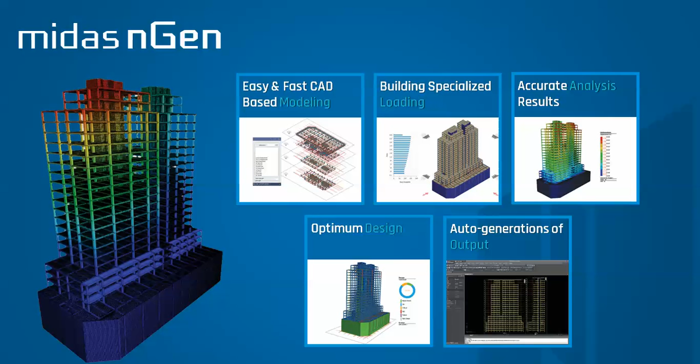CAD-based modeling. We can define our members by drawing lines in CAD and use snap points, or define a member by specifying the coordinates of the member endpoints, and of course various editing functionalities such as extend, trim, and offset. This nGen is like CAD, its modeling is CAD-based. Everybody knows what CAD means.

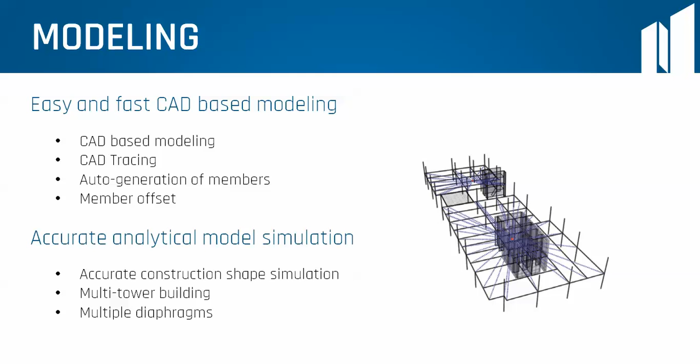Next po, itong opening. Mag-easy generate na po ang ating nGen ng mga opening whenever we need it in our projects. And auto-generate po ng mesh reflecting various shapes of the opening, depende po yan sa ating klaseng opening.

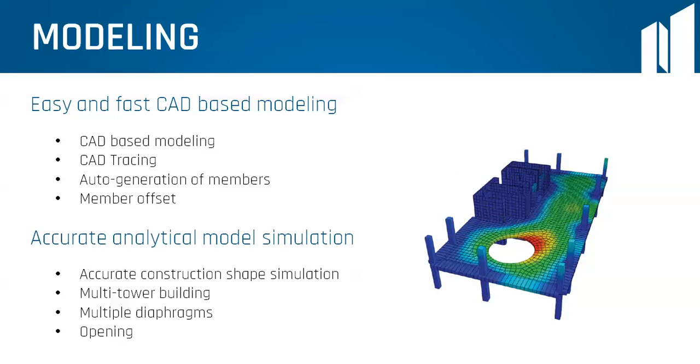Now, on our loading and analysis, meron po tayong practical loading definition for building design. Ito po, may intuitive user interface po siya for fast data input. First is defining our slab load.

Now, in the definition of slab loads, pwede na po natin siyang i-define slab loads into slab members. And mas madali na po i-revise yung applied loading value at ang ating area dito sa ating Midas nGen.

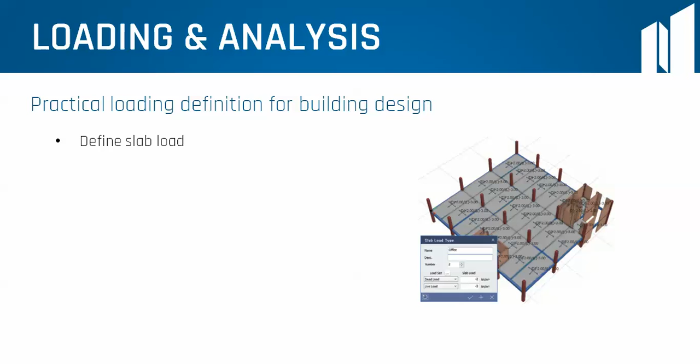Now, we can also define wind and seismic loads when we apply it in our loading and analysis. May auto-generation of wind and seismic loadings na po for the building.

And may loading profile and report generation na po siya, automatic, katulad po na nakikita natin sa picture. And of course, seismic loading input due to response spectrum function, meron na po niyan dito sa ating Midas nGen.

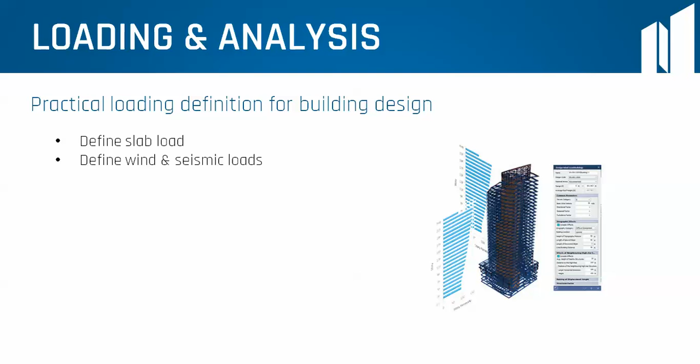Now, we can also define notional load. Ano po ba itong notional load? It can auto-generate for notional loads as per Eurocode and BS code, and may equivalent horizontal force na po ito based on the user-defined proportion ratio of the vertical load.

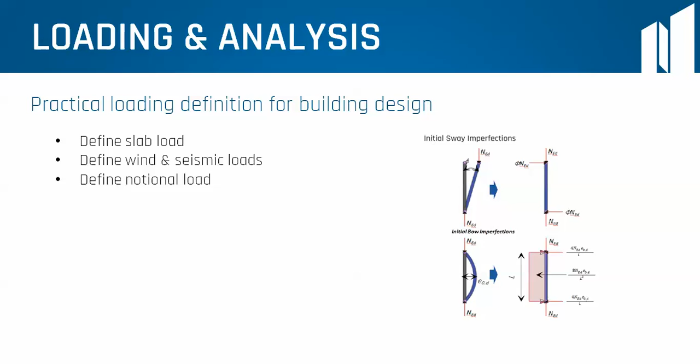Next po is we can also define our loading functions dito sa ating Midas nGen. May loading definition na po tayo dito in the form of a user-defined function.

Definition of soil pressure loading using geotechnical investigation results, pwede din po natin gawin yun. And of course, change the loading positions by moving the member, kasi nag-iiba po yung ating loadings kapag nag-move tayo ng member, so automatic na po yan sa ating Midas nGen.

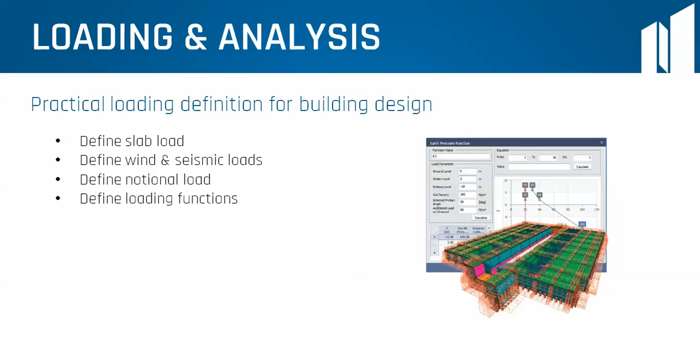Ngayon naman po, meron tayong advanced analysis features dito sa ating Midas nGen. Ito po yung parametric design using analysis cases. Makikita po natin na significantly, mas mabilis po yung speed natin.

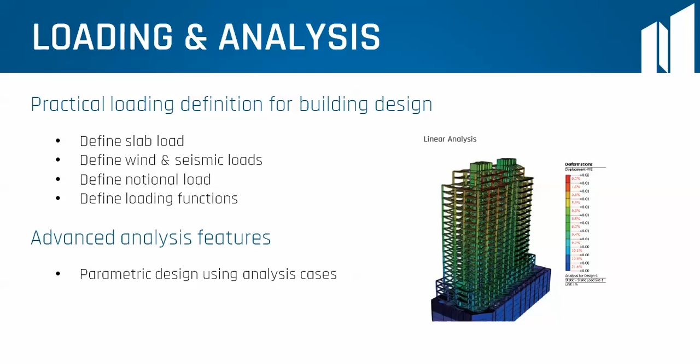For linear static, modal, buckling analysis, crane, and construction stage analysis dito sa ating Midas nGen.

It can also create various analysis cases composed of combination of members plus loads plus boundary conditions of the modeling data, which can be separately or jointly analyzed, or coupled analysis can be performed as well.

Now, we can also combine member force results of various analysis cases as required at the design stage.

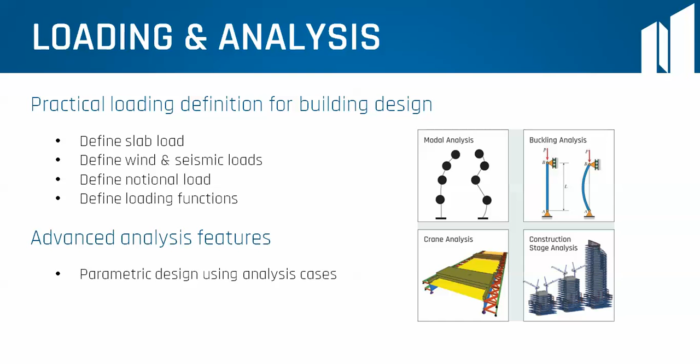Meron din po tayo dito sa ating advanced analysis features, meron din po tayong auto-generation of mesh reflecting connections between members. Makikita po natin na mag-auto-create na po ang analytical model natin from a geometric shape model.

For which midas nGen creates fictitious nodes at the connection positions where members meet. So, mas madali na po sa atin yan gawin.

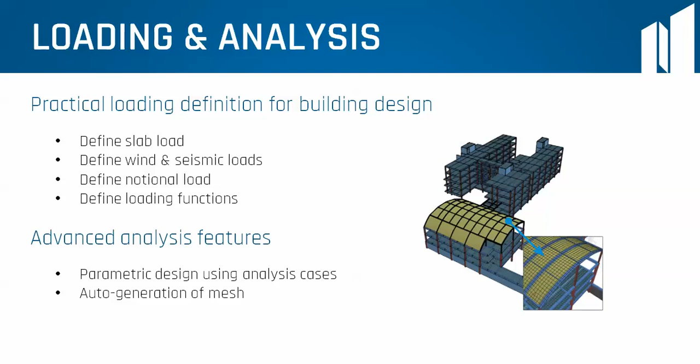Meron din po tayo ditong direct analysis method, or tinatawag po nating DAM, as a new design method for stability. Available na po ito, which includes nominal geometric imperfection and stiffness reduction effects directly within the structural analysis for a more accurate structural behavior. Now, so much for our loading and analysis.

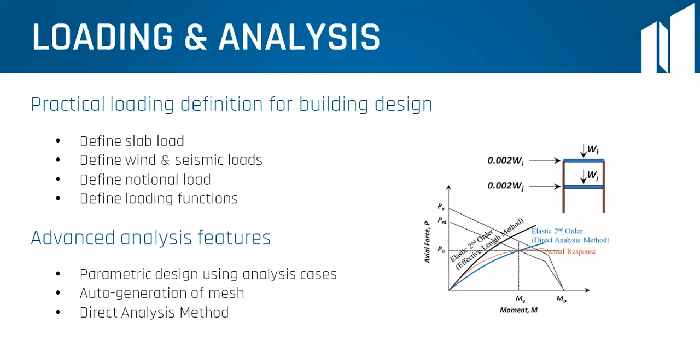Punta naman po tayo sa ating design. Dito naman po sa ating design, meron tayong optimal steel section and reinforcement calculations. Makikita po natin na meron tayong dito sa 2D member design.

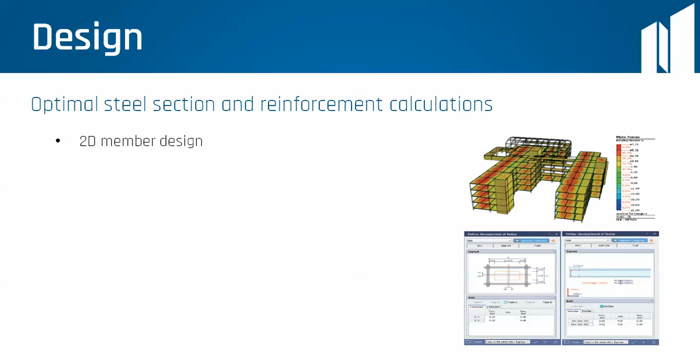Meron na po tayong optimal rebar placement for wall and slab members, and also a summary and detailed design report for 2D members.

Ngayon naman po, meron din po tayong calculation of optimal steel sections. Makikita po natin na it can perform steel section calculations through searching for optimal sections from the section database.

On the basis of the target strength ratios of all the design categories, including relative displacements. At meron din po tayong makakontrol na din po natin yung range of section sizes by member groups, while keeping the auto control of limiting sections by member connection conditions.

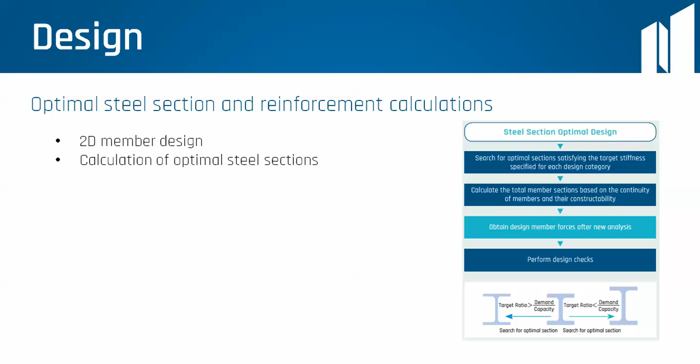Hindi lamang po yan, kasi sa steel lamang po yan. Ang sa reinforced concrete naman po, meron tayong calculation of optimal reinforcing steel. Ito naman po magka-calculate na siya automatically ng reinforcement of minimum quantity reflecting the positions and spacing of rebars.

With respect to the width and depth of the member based on the target strength ratio for each design category. Now, in case of plate members naman po, nag-auto-calculate na po siya ng reinforcement corresponding to the XY local directions, as we can see in this photo po.

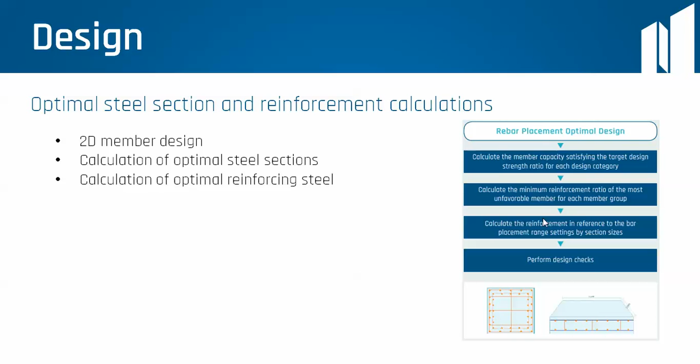So, meron din po tayo dito sa ating design, automation of design. Meron na po siyang intuitive setting for design parameters and checking the design results. First off, meron din po tayong auto definition of design parameters by members.

Kita po natin na may makaka-auto define na siya ng design parameters as per design codes by design positions. Now we can also set design parameters all at once and check or edit the data in a table form.

At saka check auto-calculated design parameters such as unbraced lengths in contour graphics. So much for auto-definition of design parameters by members. Next po ang ating auto-generation of load combinations.

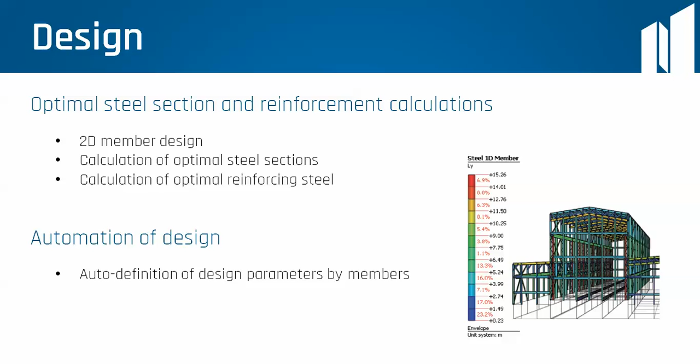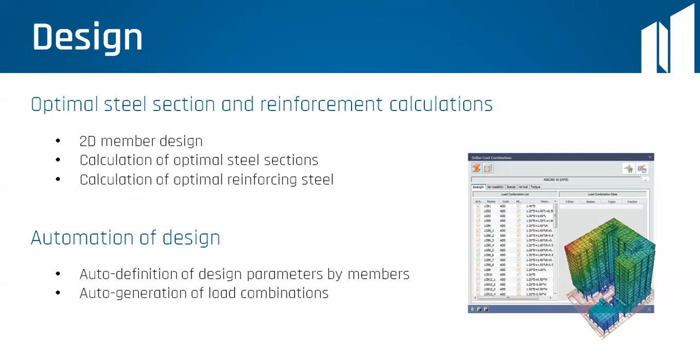midas nGen has the capability to auto-generate load combinations using a template by load types based on a specified design code, depending on which design code we use. We also have design code-based load combination templates through implementing a user-defined database that we can use in midas nGen.

We also have a graphical design evaluation report. We can check the design results of the total model through strength ratios represented in colored graphics of design assessment categories. We can see the members of our structure, if it's not checked, if it needs checking, if it's okay, critical, or if it will fail. We can see that in our design evaluation result.

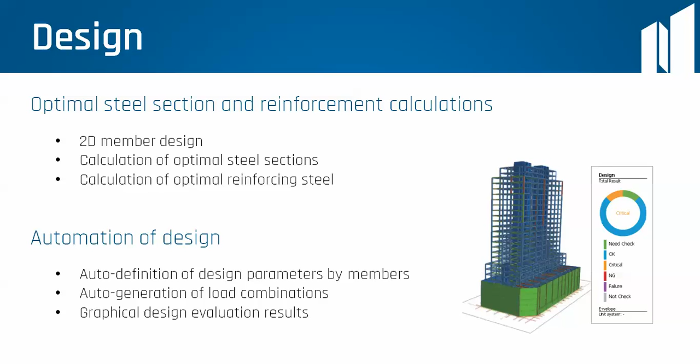It can also classify the design assessment categories considering the specified target ratio. Lastly, we can have a detailed design results check. We can select a member from the model view and generate a structural calculation report in Word format using midas nGen, and also assess the detailed design results of all design check items by members in a table.

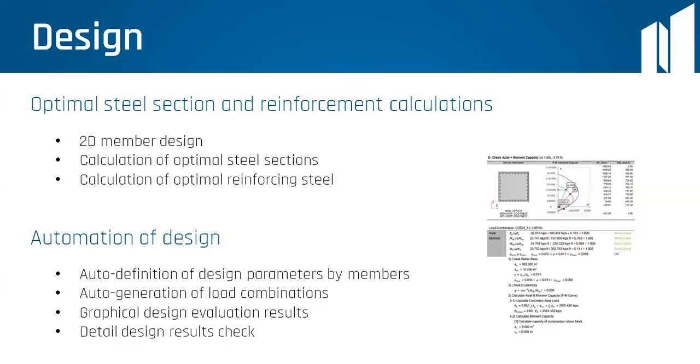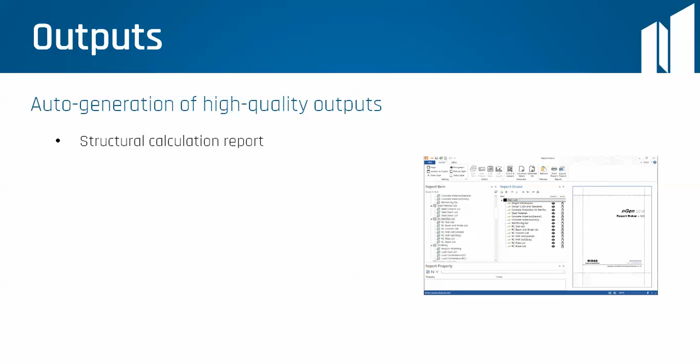Now, for the outputs we expect after designing using midas nGen, we have auto-generation of high-quality outputs. Why high quality? Because we have a structural calculation report. It auto-arranges modeling and analysis result graphics to be inserted in the report from grid or plan information. We can also include user-specified templates to use identical report format repetitively, and a one-click function to generate a structural calculation report integrated with modeling, drawing, and analysis results data.

Another important output is structural drawings. midas nGen generates and edits structural drawings from Midas Drawing, which we call MCAD here at Midas IT Philippines, a 2D CAD environment. It will also generate column layout plans, framing plans, elevations, sections, loading plans, equipment pad layout, member list, and etc.

We can generate all this using the structural drawings provided by midas nGen. It can also create sections from framing plans at desired locations on plans in real time, and we can use specified templates to define the CAD properties of all auto-generated drawing composition entities. We can freely change these templates as necessary.

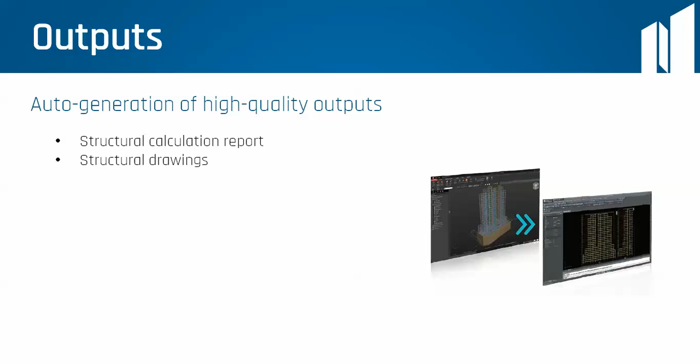Lastly, the member quantities and interface system of midas nGen. It auto-compiles member quantities reflecting constructability, with a two-way interface system. We have a structural calculation report that includes quantity calculations by lengths of unit members and member groups, compilation of quantities based on center to center of members considering member joints, quantities of steel members by steel grades or classification of concrete compressive strengths, quantities of rebar diameters, and calculation of formwork areas, fireproofing, anti-corrosive agent areas, and so on.

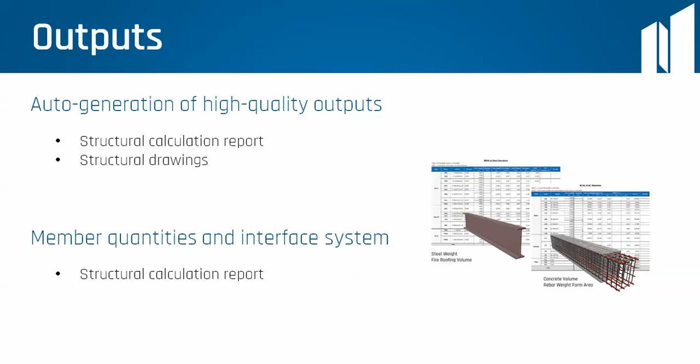We can import or export to an analysis software. We can export analysis data such as special loadings or auto-converted nodal loadings, and import analysis results and data of an analysis software model. We can also generate the design deliverables using midas nGen when we use other analysis software.

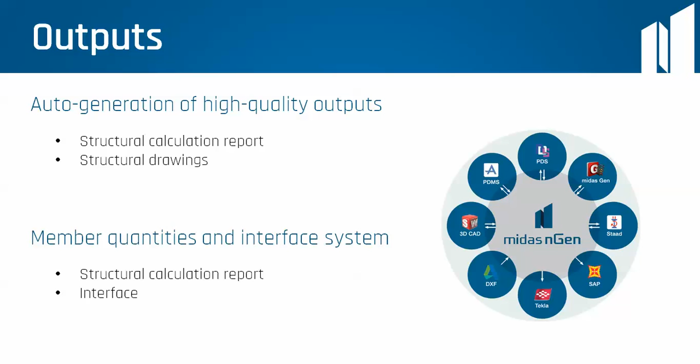That's it for the overview of our midas nGen, the next generation solution for building analysis and design.